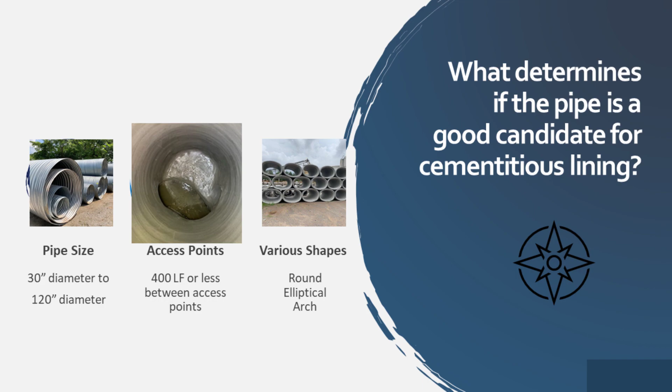The first thing that I want to talk about is what makes a good candidate for cementitious lining. Well, the size makes a big difference for us. 30-inch diameter to 120-inch diameter are good diameters for cementitious lining. We generally like pipe lengths of 400 feet or less between access points. We can handle some pipes with some bends.

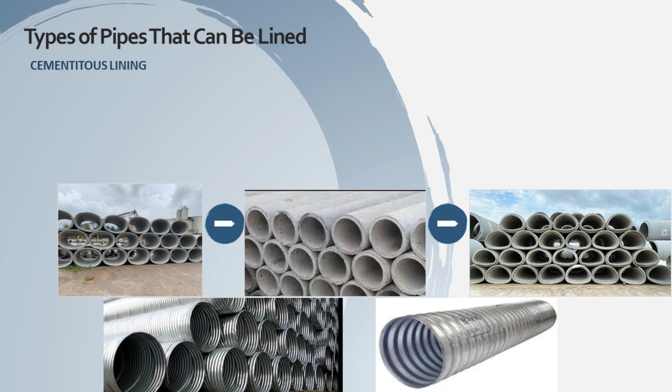We can handle various shapes of pipes, round, elliptical, arch, and we can handle different kinds of construction materials. We can handle corrugated metal, reinforced concrete pipes, clay, brick, ductile iron, steel.

I'll start with the most common, which is reinforced concrete and corrugated metal. With reinforced concrete, this probably represents only about 10% of our cementitious lining, but one of the things that we find common is that there's a lot of open joints in precast reinforced concrete pipes, and we're asked to go in and line those. There's also situations where there may be some cracking issues with the pipes, but corrugated metal is the sweet spot for us. Rusted pipe inverts, open joints, missing sections of inverts, voids in the inverts, voids around the open joints.

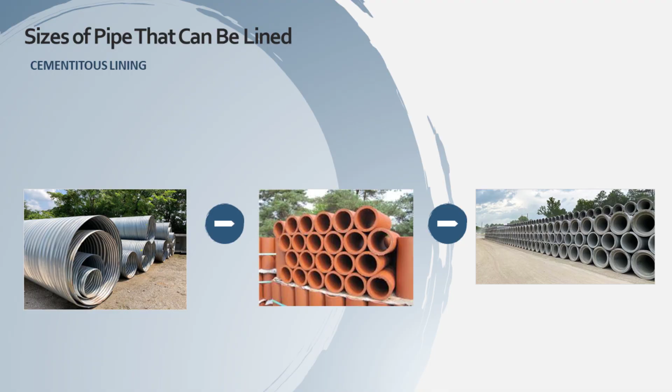And I'm going to transition here to a quick video from our confined space drone that shows the capabilities of our drone, and it shows pipes that are good candidates for cementitious lining. I hope you find this video an interesting use of technology. So with that, I'll go ahead and get this video started.

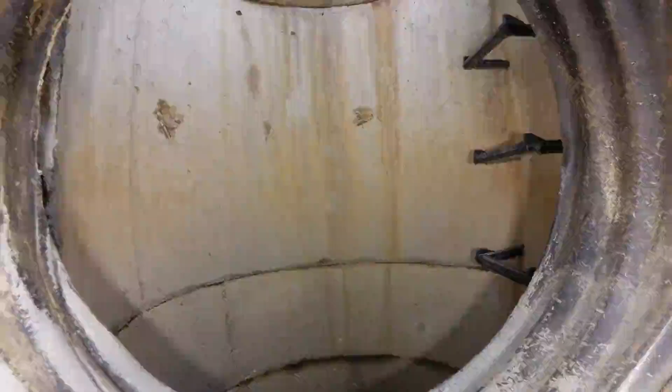This is video from our Helios 2 confined space drone. This drone gives us the ability to fly into confined spaces that may be impractical or too dangerous for manned entry. We find it an effective tool in quickly assessing storm pipes that have developed sinkholes or may pose a public safety concern. This quick inspection helps us develop repair strategies and identify potential safety hazards inside the pipe should manned entry become necessary for the repairs.

As you've seen in this video, we have flown our drone in many types of pipe conditions. The Helios 2 can handle some bumping and water spray. However, hard crashes and submersion in water can cause a total loss of the unit. This is a very expensive drone, and the flights you've seen require the highest level of pilot training and competency to avoid severe damage to the unit. As a disclaimer, I'm not encouraging utility owners or contractors to purchase this drone for the type of inspections you've seen in this video.

All right, I hope you found that video an interesting use of new technology. The video showed pipes that were still candidates for cementitious lining. Matter of fact, all those pipes you saw in that video, we did line and repair using cementitious linings.

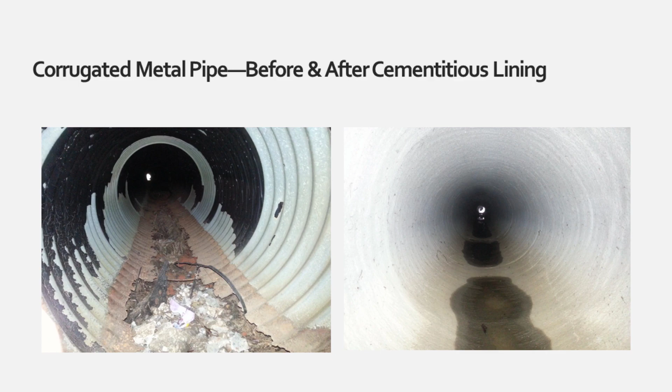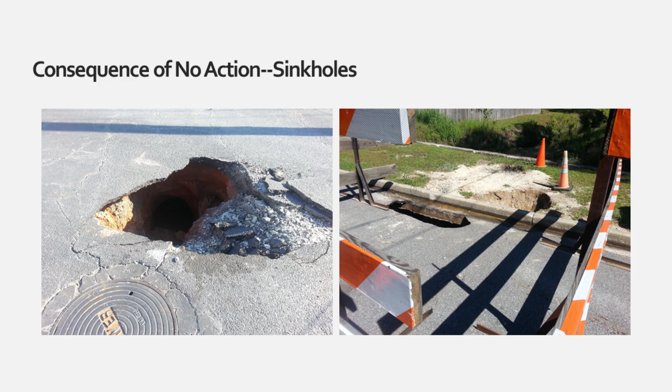We can even repair the pipe. But then there's the place where you're having to be reactive, and that's the picture that we have here. This is kind of when it's too late for trenchless repairs. So I just want to keep emphasizing the fact that we want to be proactive and not reactive.

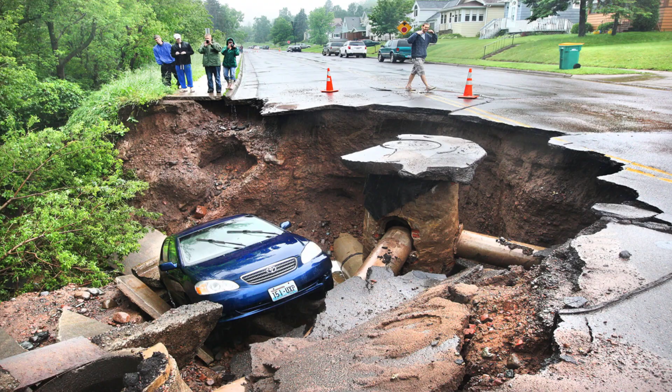We can do that because we only have to consider the in situ loading, or the existing loading, on that particular pipe. When you are installing something like reinforced concrete pipe, that pipe must be designed to withstand the shipping, handling, and installation stresses. That's not the case with a cast or made-in-place type product like cementitious lining.

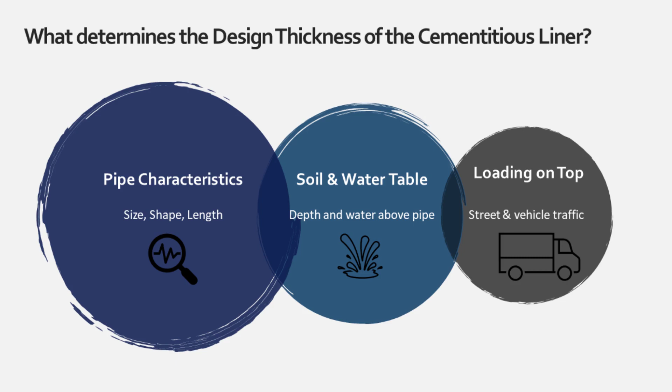And with that, I'm going to toss over to Craig, who can talk more about the material and lining process.

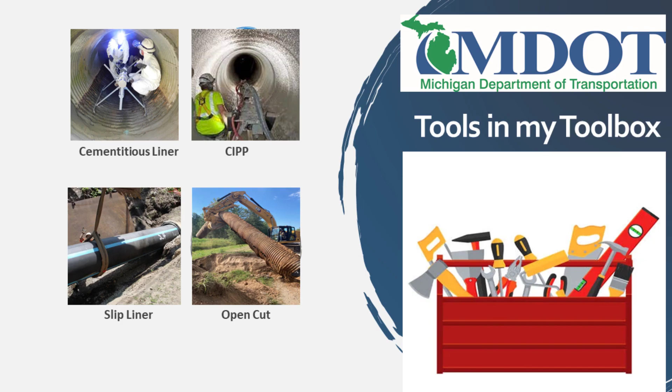So next we'll go over some tools in my toolbox. I'm pretty fortunate to be able to use quite a few different methods to repair.

First we'll go over open cut. It's not exactly a trenchless technology, but it does have its place, usually when ride quality becomes an issue. It's 100% reactive maintenance - there's a hole caused from a leaking tube that makes its way up to the road surface. So we fill any voids in between that tube and the road to get density and compaction, and then put back the new asphalt to take care of the ride quality issue.

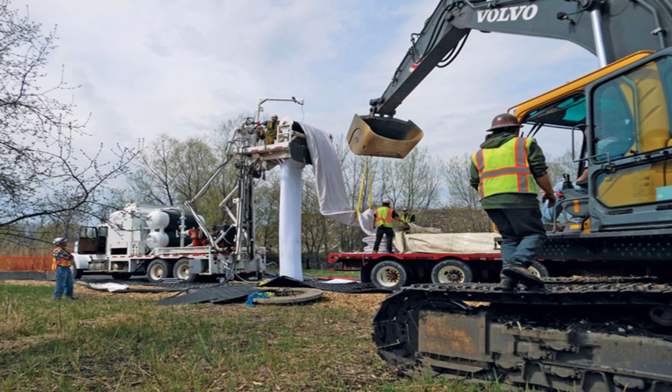Cured in place pipe - I don't have a lot of experience using this. A couple times it requires a lot of right-of-way or area to work in. You see all the equipment and manpower involved. It's pretty costly. One thing I didn't like is that it told us to fill any voids first with a grout or cementitious material, and in my mind it only made sense to just start with that type of material to do the lining itself. Also the curing process up here in Michigan - we don't always have the best weather, so the colder, wetter conditions played a part in the curing of that product.

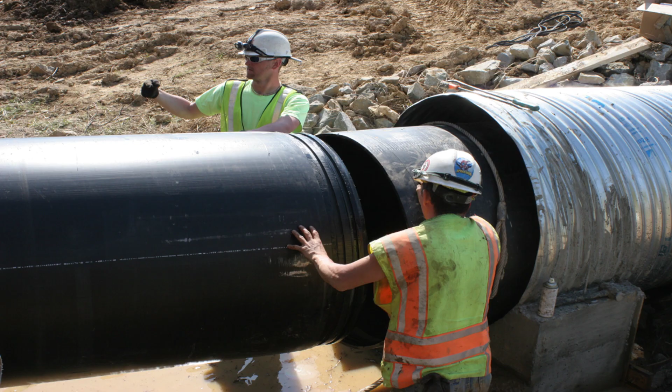Here's some slip liners, and we've done some slip liners with our own crews. They're a little bit easier to do. There's a few different kinds, brands and types that snap together, kind of the same result. You still end up with a joint in there, and I don't like that. Some of these other ones, like the cementitious liner we'll get to next, you don't have that joint. It requires you to fill that little void in between the host pipe and the liner itself with a grout or flowable fill. It's not always easily accessible here in northern Michigan.

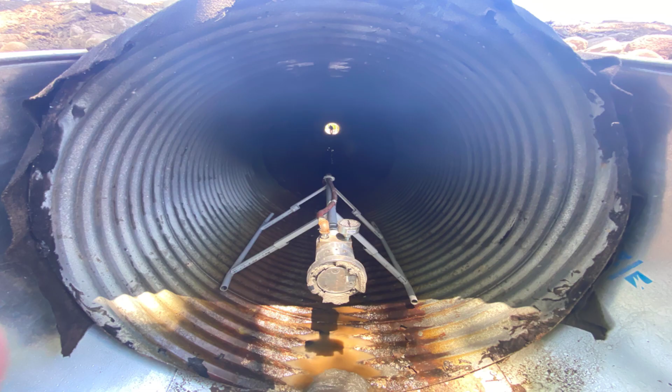This is a cementitious or spin cast liner, I call it, and I've tried this method quite a few times on horizontal and vertical applications, and it's been a really good product. It's clean, and in the end I believe it sets up at 10,000 psi. What I like is that if it's not applied too thick, it comes out where we can still utilize those corrugations to slow down the velocities in the water.

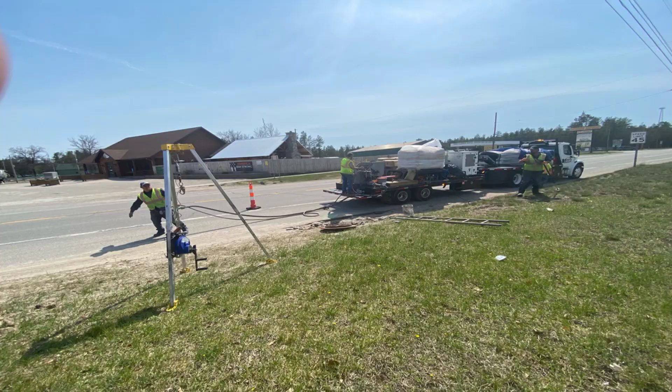Here's a picture of our crew doing just that. They're doing a manhole and some stormwater discharge at the catch basin, and what I like is the footprint is a lot smaller. The crew - it's a lot less intrusive in the roadway, and of course ahead of this crew would have been a vac truck to clean it out, wet it, stuff like that. But as you can see, it doesn't take up a whole lot of right of way to do that operation.

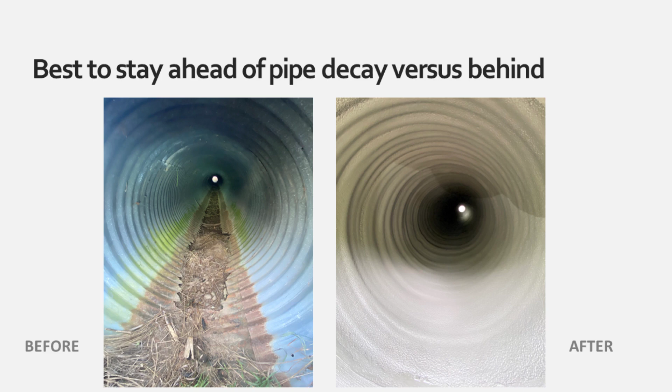This is like a before and after. So the pipe on the left - I'm sure I have quite a few that look just like that I'm not even aware of. The bad thing is, until we start doing these proactive corridor approaches to our highways, you don't find them until they're inspected or until that day. It's usually late night, maybe a holiday weekend, when I get a call that there's a hole in the road because it finally showed itself on the road surface. On the right, you can see those corrugations helping to still slow the velocity down. It's a big factor with us in maintenance because of the erosion issues.

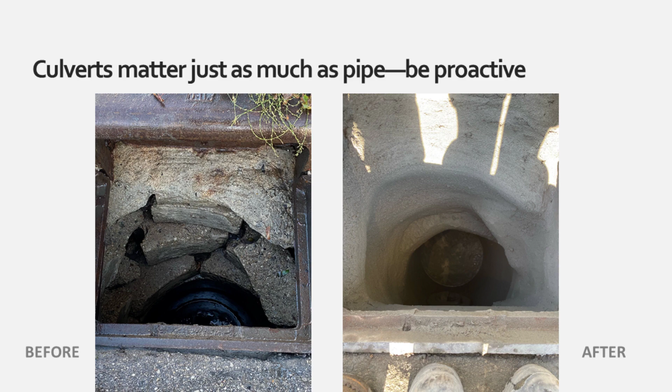This is from top to bottom, so it shows that we use this cementitious material, the ML72, which is the one we've been using, right from the top down. So that shows our catch basin, a before and after. With that material setting up at 10,000 psi, you can see all those old bricks - once those get locked in place with that spin cast material, it really is rock solid, like dealing with a brand new catch basin. And we treat that from the catch basin all the way out to the discharge end.

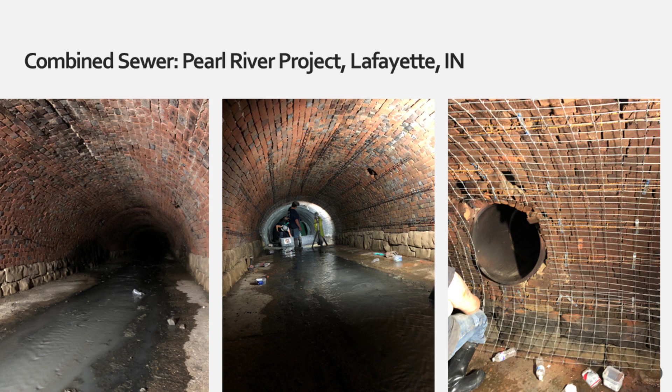You can see the C-channel brackets that were lagged in on the top middle picture here, and then the wire mesh that they put in. Once that wire mesh was put up, they would basically shotcrete their mortar into that wire mesh, and it would hold about 1 inch behind the wire mesh, and then they would build it out another inch on top of the wire mesh.

Right here you can see the finished product of that pipe. Again, they didn't do the bottom; the leftovers from the shotcrete were fine for the bottom. As they walked out, they smoothed all the ripples of the mortar out in the bottom. That was 2 inches thick, and that extended that pipe for another 40 years.

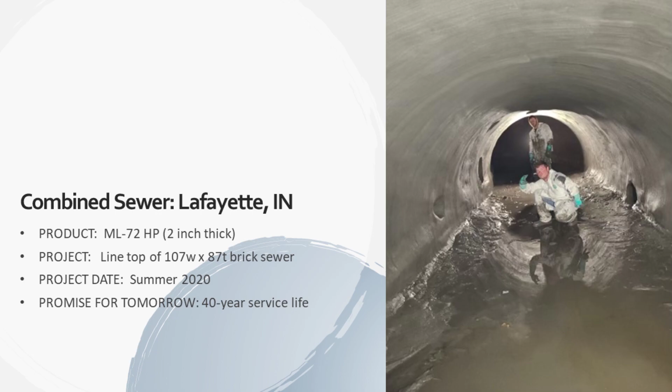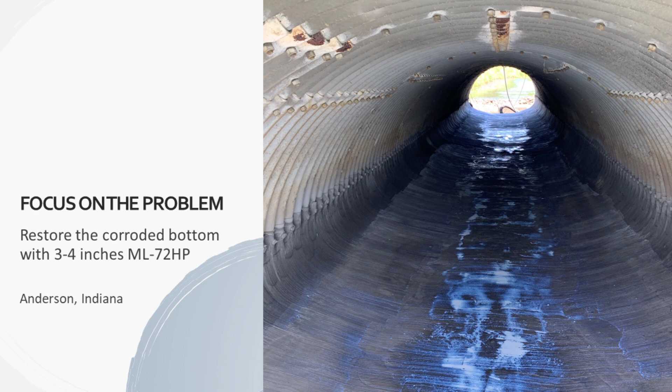The white milky substance you see in the middle is a concrete sealer that they sprayed on once it got hard enough to walk in. They did that because these were open-ended pipes with a lot of air moving through. Even though we're using the ML72 HP, they were just taking precautions against any cracking or drying out too fast.

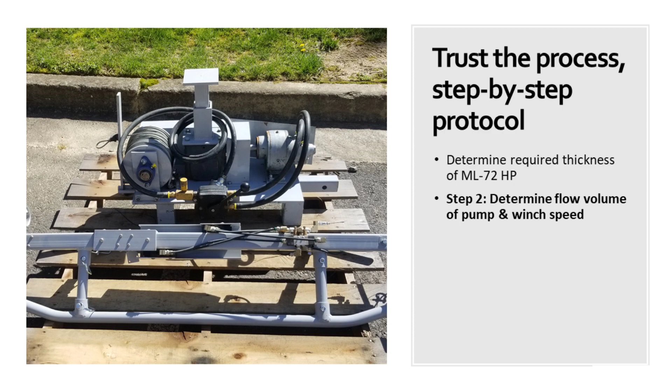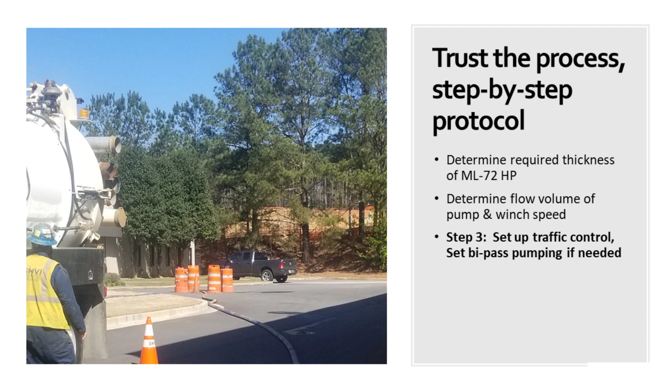Trust the process step by step. One is to determine the required thickness of ML72, and then determine the flow of the pump and the winch. Basically you put the bucket up to your pump, determine how quick your pump is pumping, and that'll determine the speed of your winch pulling. Set up any traffic control and any bypass pumping if that's needed.

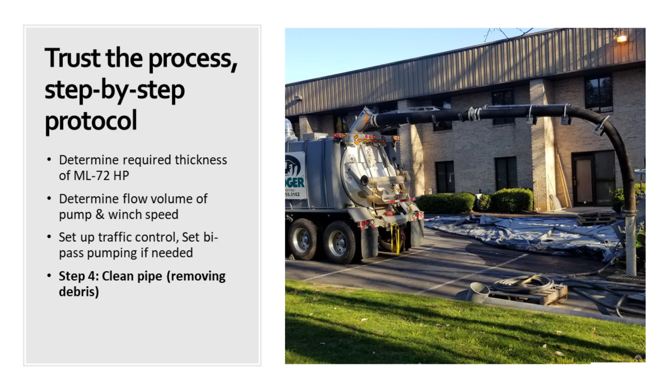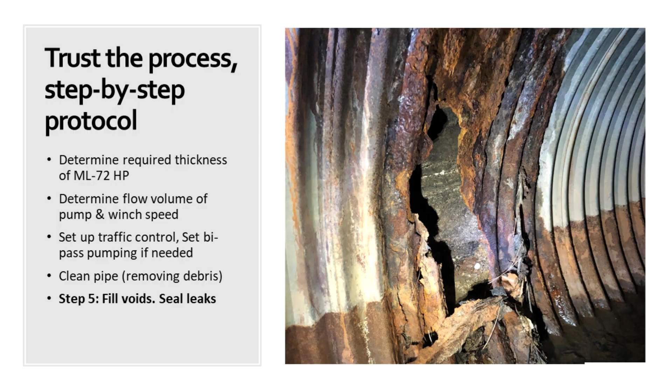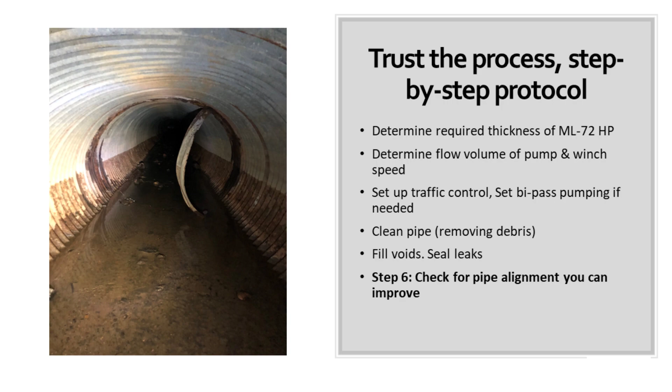Cleaning the pipe. Once you clean the pipe, you're still going to have the rust and whatever the original host pipe is holding, but you need to get out all the loose debris in there. Fill any voids or leaks. In this pipe here, with that hanging down, you're just going to cut that off and fill the void, and then any leaks that are in there.

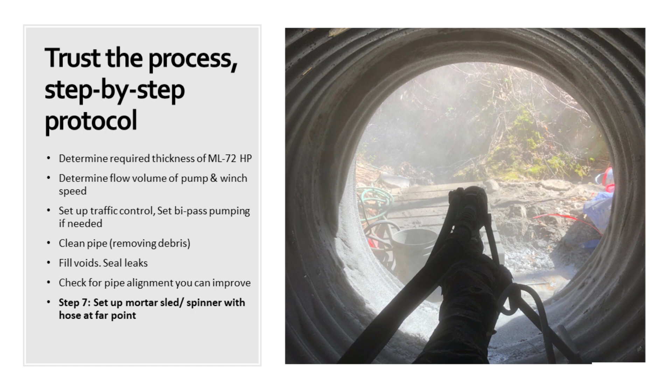And then spin casting for even distribution of mortar. Starts with the pump, the winch. The key is not to stop once you get going. Apply as much as possible in the first pass.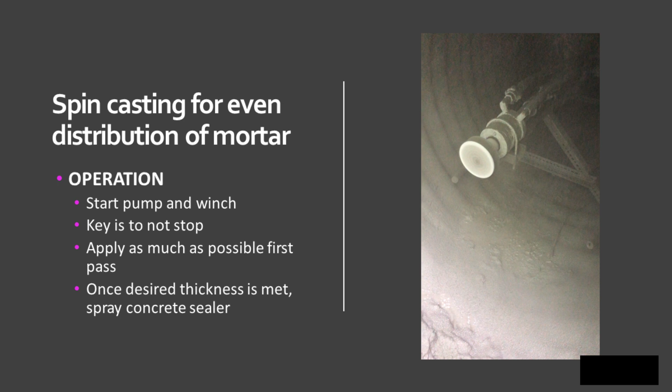Once the desired thickness is met, then you can go through there, give it a couple hours, and if you can't block the head of the pipe off, you can always spray a concrete sealer on there to keep it from drying out, and then that is it. I believe from here we will move on to Don, maybe.

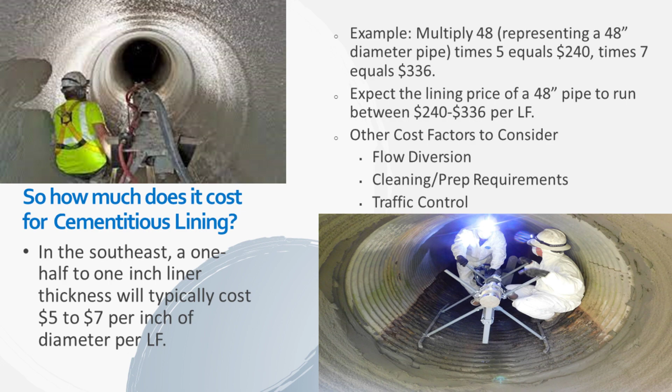And of course, quantity will impact the price a lot. If you only have a 30-inch pipe that's 30 feet long and you don't have a local contractor available in that area to do it, then it's obviously going to cost a lot more than that ballpark estimate that I gave you there.

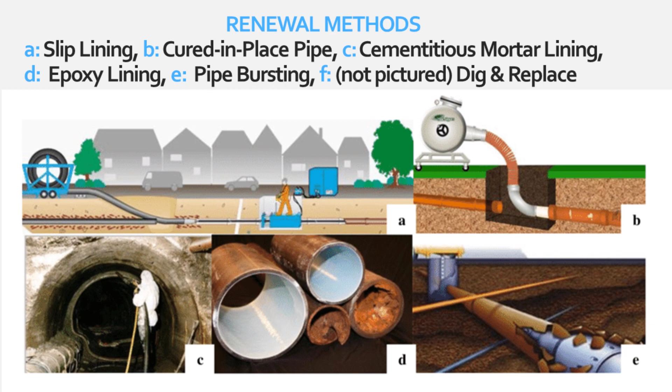Next, I want to transition to some of the alternative repair methods and go in order of cost, starting with the most expensive, and that would be alternative number 1. The most expensive thing is to do nothing, or procrastination. This is one of the things that Eric and I both have talked about. When you're having to be reactive instead of proactive, it becomes really expensive to maintain your assets.

The second alternative would be dig and replace. This is typically the most expensive repair if the pipe is located under pavement or near utilities. If you're working in a shallow easement, then digging may be a better option. The next would be pipe bursting, alternative number 3. It would be the next most expensive, and this is less common in stormwater. I have seen it used before, but it's less common.

It may be a good option if you need to increase pipe size by just a little bit. It's expensive. Some of the factors can make it impractical for stormwater type applications.

Then number 4 is CIPP, cured in place pipelining, and CIPP is a good fix, especially for smaller diameter pipes. However, the CIPP gets more expensive as the diameter increases. As the existing pipe diameter increases, the bag for the CIPP gets thicker and heavier, and as Eric was talking about, it gets to where it requires a lot of equipment to move it around, and requires a large footprint. And he also addressed that it does not address the voids in the invert.

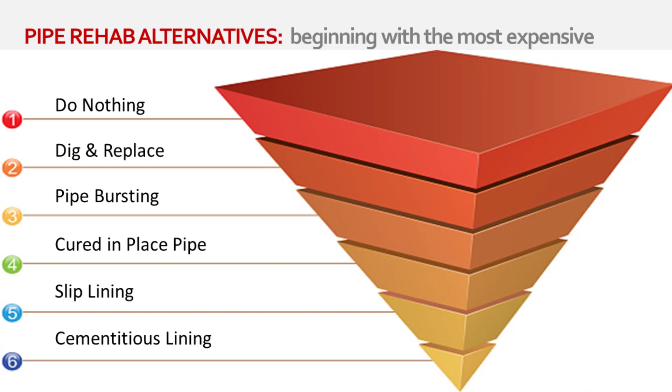They called me and asked me to quote a cementitious lining for the pipe, and when I inspected the pipe, I walked down and took a flashlight and looked at the joint, and I could see the underside of the street. I could actually see pavement when I would shine my flashlight up, and so the void was about the size of a Toyota Camry above this pipe, and you can see in the next picture here some other things going on, what actually led to this.

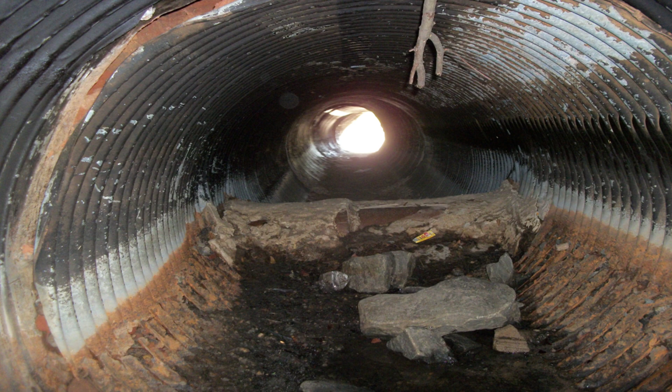You can see the picture of the open joint, and you can also see a clay sanitary sewer pipe that was laid through the bottom of the storm pipe. And I know there's nobody here that's ever had that type of situation happen before, but the clay sanitary sewer pipe was causing the water to back up and stand in the pipe, leading to the invert corroding, and that in turn led to an open joint.

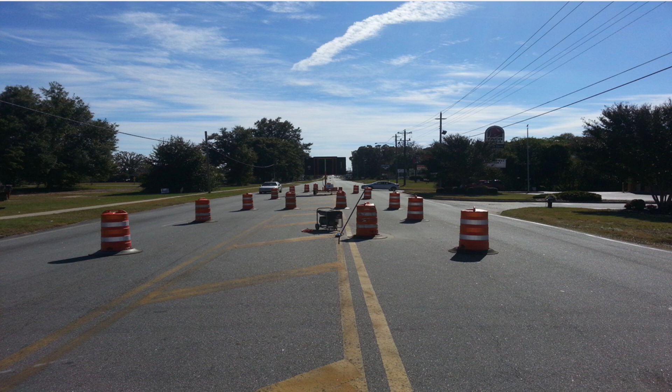I notified Public Works and told them about the void and the urgency of the situation, and they immediately closed the section of street where the void was located, and they asked us to make this repair a priority, and we were able to do that. And we actually were able to remove that clay pipe in the bottom. We found that it was actually an abandoned pipe, so we could remove it pretty easily. And we were able to take care of the void from the top of the street.

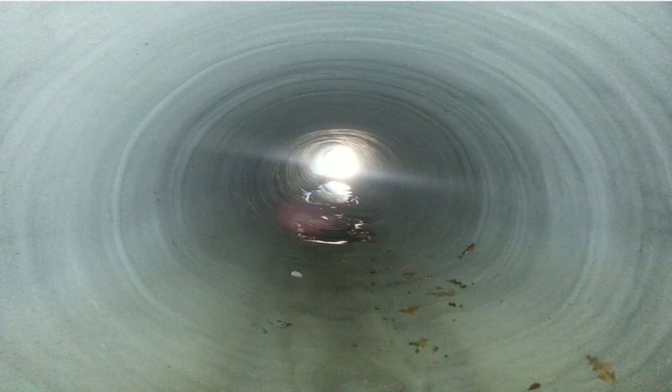And then we were able to install a 1-inch thick cementitious lining. And this is the same pipe, looking at that same general spot. This was done a few years ago, but this repair was like a $52,000 repair, just to give you a price comparison there.

And with that, I'm going to toss over to Eric, let him talk about what's important to him as someone who deals with these kinds of pipe repairs.

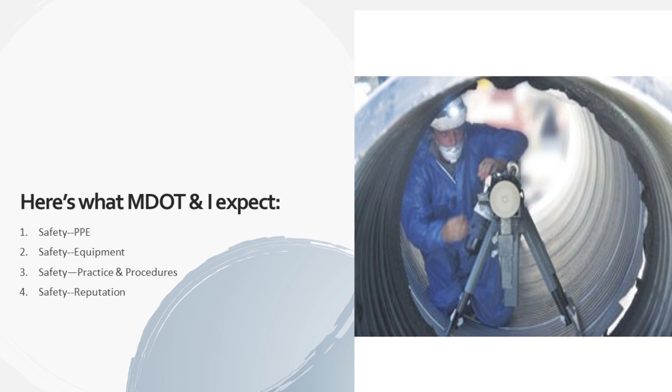And when we do it proactively, like I said, we are able to competitively bid that out, and we end up with a contractor who usually will pull off our state pre-qualification list, which is a list where you send in paperwork, some money, and you've got to provide a list of your equipment. You send it to Lansing, our capital. They review it, go over it, and get your name put on the list. So it's worth it for those guys to do that for sure.

Here we'll go over some. So in Michigan we have Environment, Great Lakes, and Energy. The acronym is EGLE. That is our environmental permitting agency here in Michigan. I do actually have a good relationship with my environmental liaison through EGLE. I would say everybody from a transportation standpoint start there, because do you need a permit, do you need a plan, design, is it emergency work or not? That guy will tell you. He'll help you through all this.

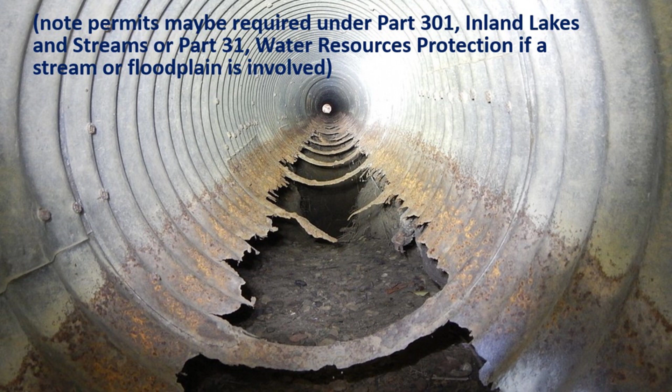So under Part 301 Inland Lakes and Streams, or Part 31 Water Resources Protection, if a stream or floodplain is involved. I did see a question pop up from Washington DOT wondering about some of this stuff, and it does play a part in what we do.

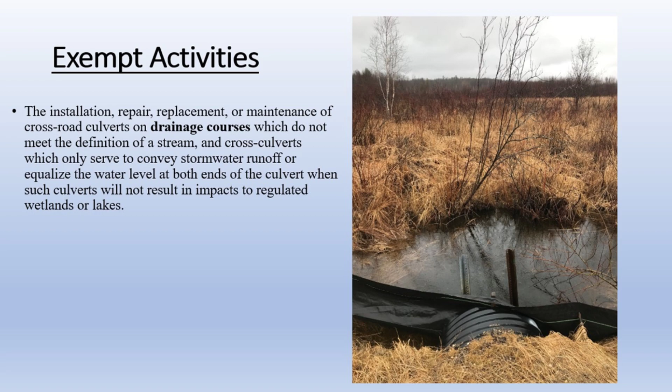Exempt activities are the installation, repair, replacement, or maintenance of crossroad culverts on drainage courses which do not meet the definition of a stream. An easy way to do it in our state anyway is to look at a map: is where you're at a blue stream? Because then more likely there's a trout that lives in there somewhere, and you've got to go through that process. But cross culverts only serve to convey stormwater runoff or equalize the water, basically an equalizer pipe that equalizes maybe a swampy area from one side to the next.

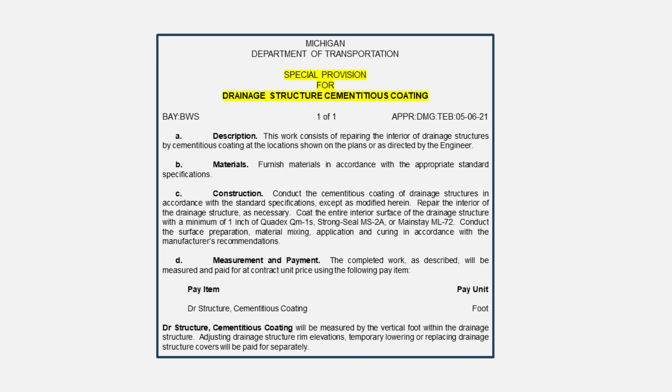Here we're going to move on to something MDOT has established through our capital in Lansing. It's called our MDOT Special Provisions List. I compare this to our pre-qualified contractor list. This is a pre-qualified list of materials and/or activities that are listed for us to go ahead and use. So there's no second guessing whether what you're about to do to our road is the right operation.

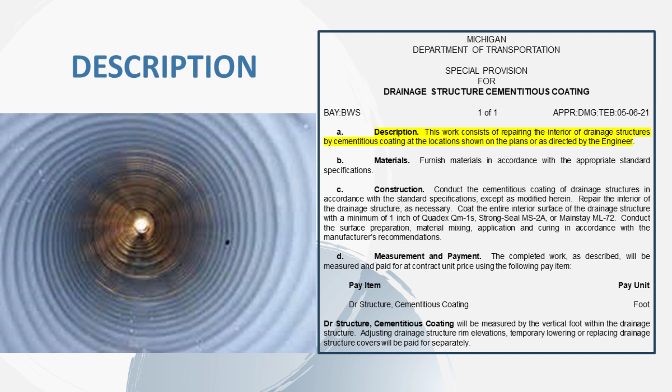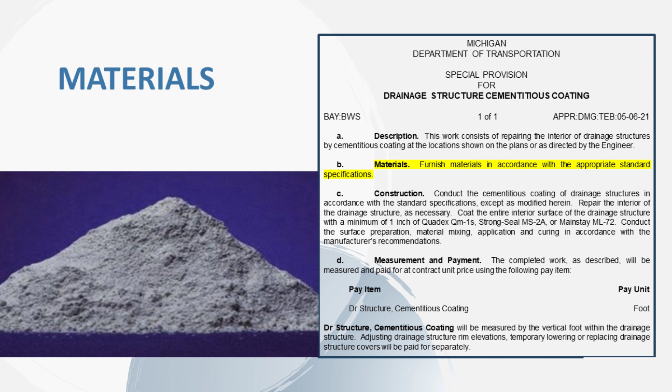This just walks you through each portion of this special provision. It goes from the description, which breaks down: this work consists of repairing the interior of drainage structures by cementitious coating at the locations shown on the plans. So it breaks down each area of this. The next goes to materials: furnish materials in accordance with appropriate standard specs.

Construction, I'll read that out. Conduct cementitious coating of drainage structures in accordance with the standard specs, except as modified herein. Repair the interior of the drainage structure as necessary. Coat the entire interior surface of the drainage structure with a minimum of 1 inch of whatever product you're going to use. In the last few years we've used the Mainstay ML72 and had good luck with that product. Conduct the surface preparation, material mixing, application, and curing in accordance with the manufacturer's recommendations.

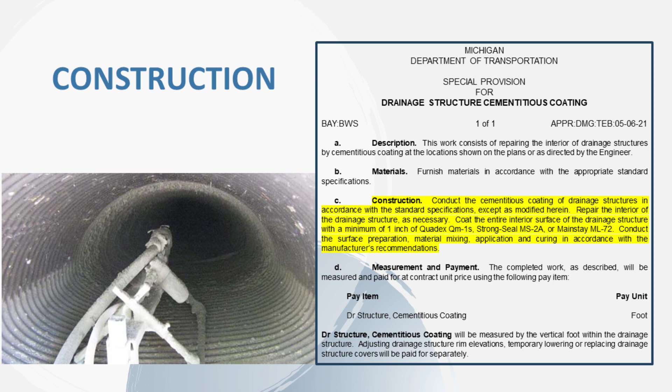Curing: about a year ago we did one up here, a pretty good sized pipe, and it was in early November, I believe. It still cured pretty fast since it's not a driving surface. We were able to put water back on it that same day, I think. It cures pretty fast, but it is dependent upon the weather.

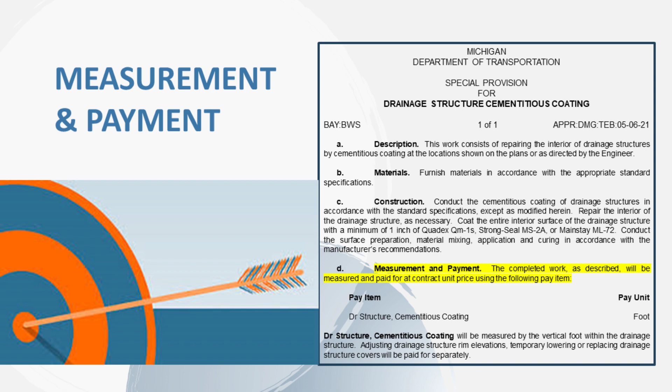Next, we'll go over measurement and payment. We usually pay by the foot, pay items per foot on a horizontal pipe, say a 36 inch by 100 feet. Pretty easy to tally that up. What can be an issue is when we do the vertical structures, catch basins and such. The top might be 36 inches, and then it opens up into a 6 foot round, gigantic manhole structure, and that's usually something we tackle on an as-needed basis.

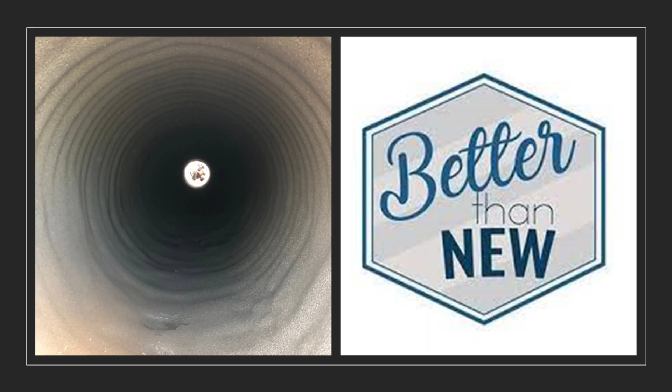Okay, so we're going to move on here. One of the good things about the ML72 HP cementitious lining, horizontal lining, is it's all monolithic. There's no joints like we talked about earlier. Once you start at the beginning or the end of the pipe and pull back, you're going to continue to pull back and just keep that going. That way there's no joints or anything, it's all monolithic. Here's a picture here.

Basically, you can see it's corrugated metal pipe that we lined. So whatever is there in that host pipe, it's going to follow that. And that's exactly why you want to be able to fill in any voids or seal the leaks, anything like that.

The ML72 HP, the HP stands for horizontal pipe. It's very similar to our regular ML72. We've just put some added polymer into it, which basically makes it extra adhesive, but it also slicks up your hoses on the inside to pump further distances, and it also helps so you don't get any cracking in it. It's a high build mortar.

You can pump this and spin it on at 5 inches thick at one time. The problem is your winch is not going to allow you to do that. You can only pull your winch so slow to build that mortar up. So depending on the thickness, that's how fast you're going to pull your sled through there to get the desired thickness. If it's too thick, you'll have to make a second pass.

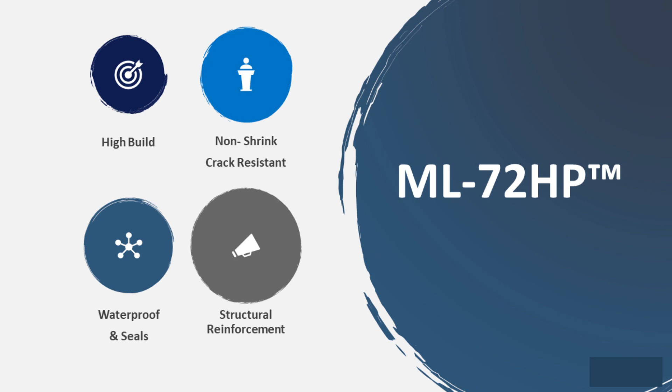It's non-shrink, crack resistant, waterproof, seals, and provides structural reinforcement on the host pipe. You're extending the service life of these pipes for another 40 years once you put this liner in there. So that's another good factor.

A lot of people are hearing about geopolymers. Our geopolymer is what we call the GeoSpin. Most of the time you see those for sewer pipes, not so much storm, well I guess you see them in storm too, but there's really no need for the geopolymer in a storm pipe just because you don't have the corrosive environment that you would in a sewer. Even a lot of sewer pipes, you don't really need the GeoSpin just because you've got other products that you can use.

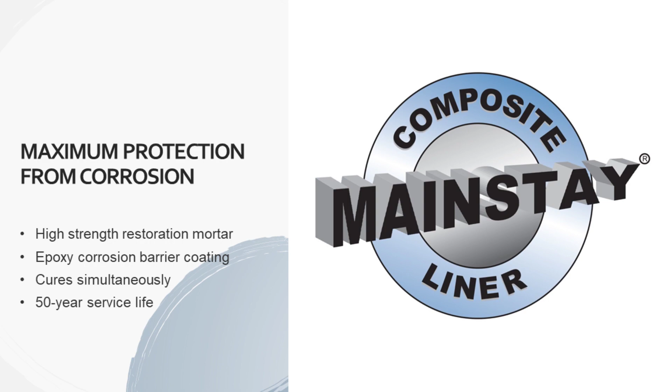If you do have the corrosive environment, the GeoSpin geopolymer is a good product to go with. If you get into a very highly corrosive area, there's nothing better than a top coat, such as our mainstay composite liner. You're going to go through and put your cementitious on the pipe, but if it's highly corrosive, you're going to want a barrier, which is our epoxy. So we go in there and spray it with epoxy, and that's your best corrosion protection.

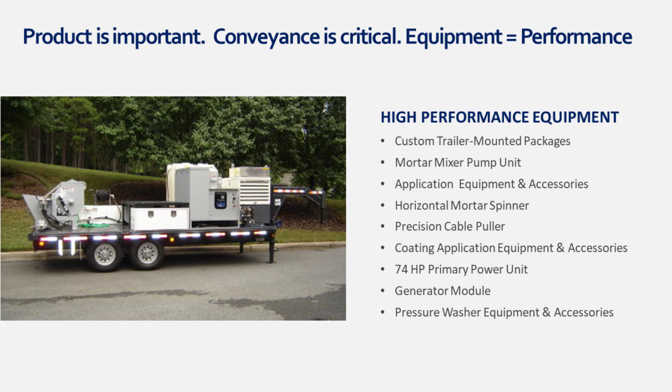We custom build them. They've got the mortar mixer on the back, which is the workhorse of everything. You can put about 8 bags of mortar in there, though most people put 5 to 6 at a time. Mix it up, dump it, and start pumping it out the rotor stator here. This unit here will do about 200 feet, so you'll have to turn around on a 400-foot section, or you can use something like a Putzmeister piston pump. We use those as well sometimes.

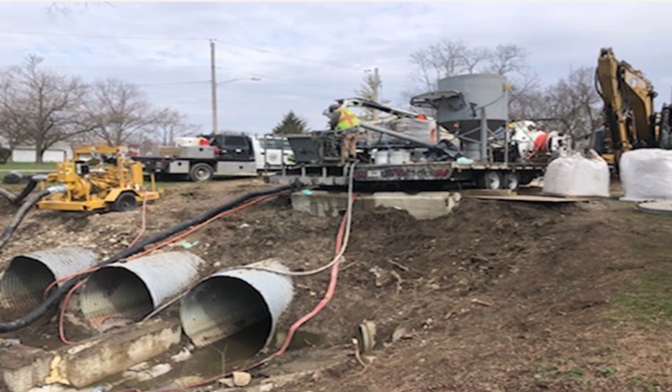A lot of bigger jobs, what we'll do is we've got a silo, and you can see these white super sacks up here in the right-hand corner. Instead of 65-pound bags of mortar and having a big pile of empty bags at the end, you take these super sacks, lift them up on top of this silo. You've got a cutter up there that'll cut those bags open, all the mortar flows down into the silo, and then as you're ready to mix, you take this auger, this swing arm, and pull it over to your mixer.

You'll just hit a button, it loads the mixer, and as it's mixing, he'll dump it, and you're just continually doing that. That way you don't have to keep opening up bags and have trash all over your job site. It makes it fairly easy to get these super sacks, instead of having basically 13 skids of mortar in bags, you'll have these 13 sacks delivered to you at once.

So that will lead us into the next review with Don Rigby. Craig, one of our favorite sayings is execution is everything, right? We do everything we can to help our certified applicators execute consistently, and we give them the equipment to get that done. Conveyance is important.